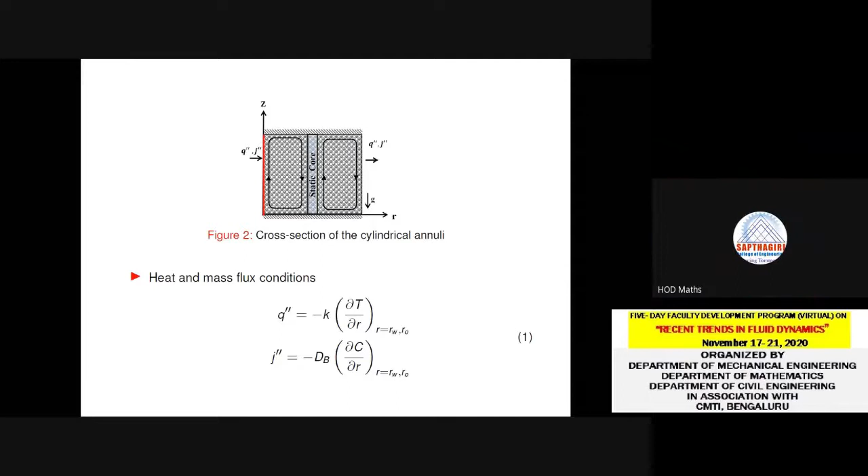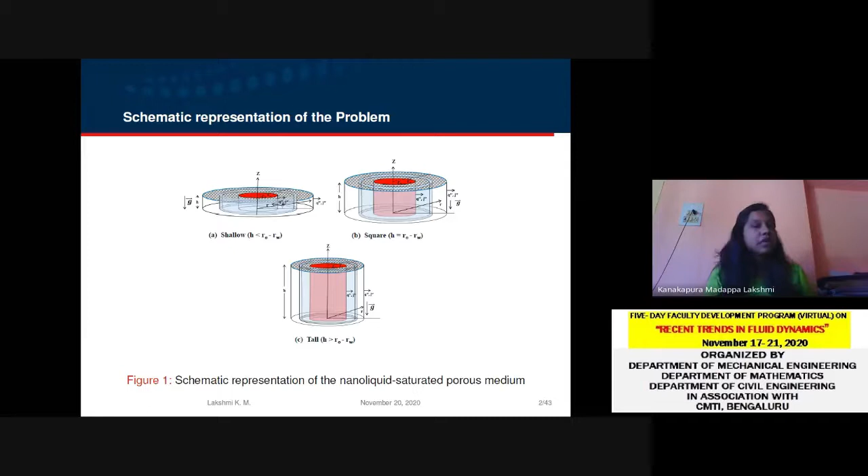Okay, yes sir. So I will start with the schematic representation again. The present work contains 3 different types of cylindrical porous annuli, namely shallow, square and tall porous annuli, where the inner cylinder is hot compared to the outer cylinder. The flow pattern considered in the system is explained in figure 2.

Since the inner cylinder is hot, the fluid particles near the inner cylindrical wall have more energy, so it starts moving upwards to form a convection cell. The strength of the heat and mass flux given to the system is such that the fluid particle has the energy only to move a certain distance near the inner wall of the cylinder, so it moves that distance and drops down. So one of the convection cells is formed near the inner wall of the cylinder.

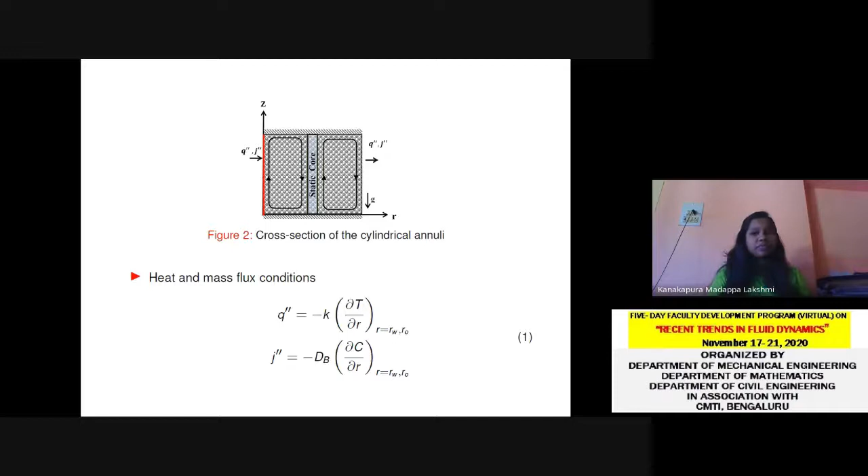A similar phenomenon can be observed at the outer wall of the cylinder, but in the opposite direction because the outflux is applied to the system. So these two convection cell flow patterns allow the system to generate a static core, which is just an imaginary region where the fluid particles are at rest. Mathematically, the heat and mass flux condition is given in equation number 1. This kind of flow pattern and this kind of study has possible applications in many fields, including thermal insulation systems, geothermal reservoirs, microelectronics cooling, etc.

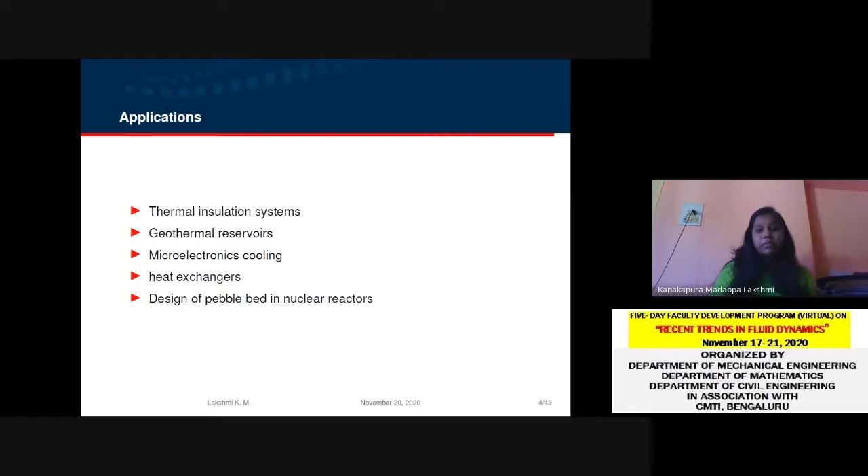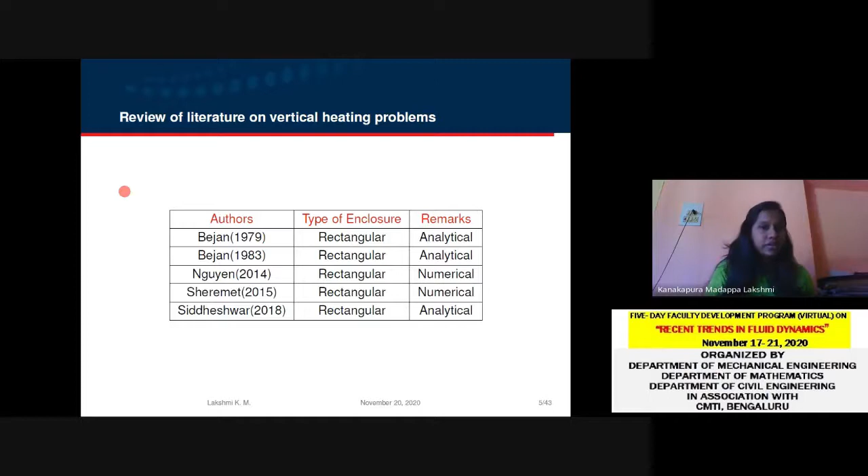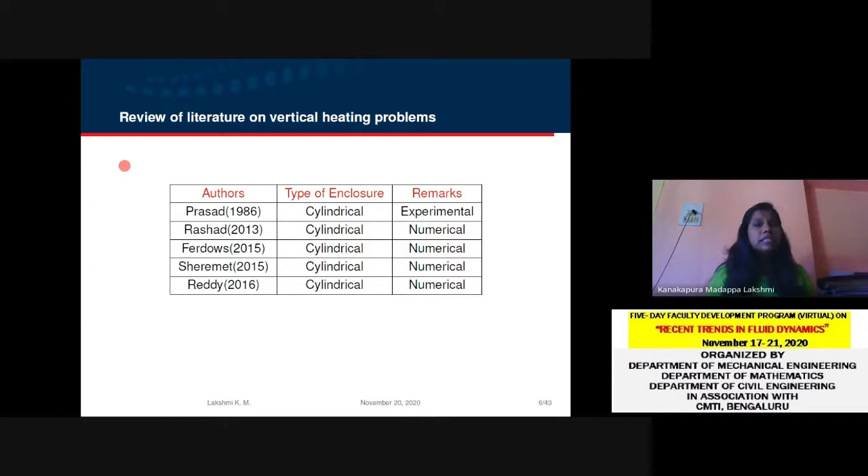Coming to the literature survey, this kind of flow pattern and this kind of work is analytically studied extensively in rectangular enclosures, and a few of them are recorded here. Coming to cylindrical geometry, there is no work available in literature which considered a natural convection problem in cylindrical geometry due to horizontal temperature gradient.

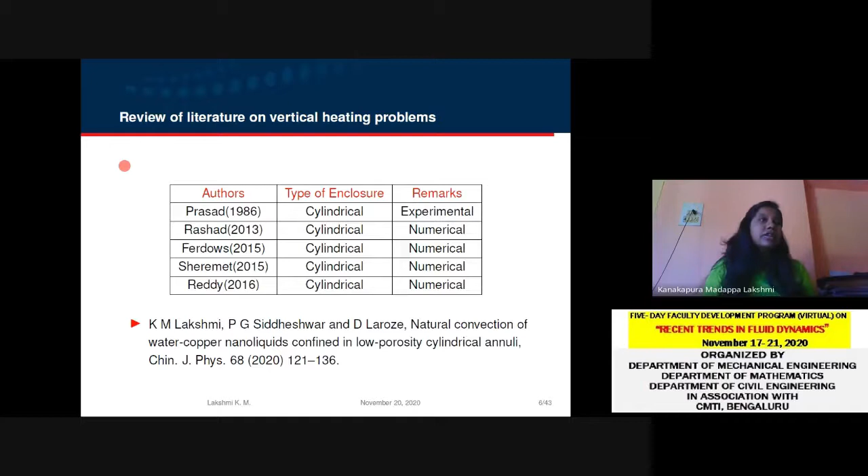Recently we have published this work in the Chinese Journal of Physics, and it appeared very recently. The same work I'm going to present now, but it is extended for aluminum alloy nano liquids.

So the highlights of the work: the analytical solution is going to be presented for a natural convection problem due to horizontal temperature gradient in cylindrical annuli.

The nanoliquid saturated porous medium considered in this study is assumed to be made up of water-based liquid, aluminum alloy nanoparticles, and glass bead porous material. For the aluminum alloy nanoparticles, we considered 5 different shapes.

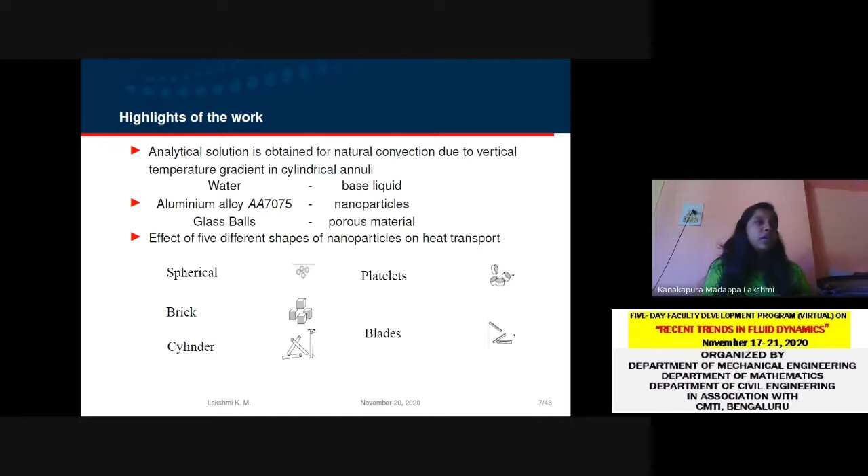The thermophysical properties of nanoliquid saturated porous medium are found from phenomenological laws and mixture theory. The phenomenological laws are used to find out the effective dynamic viscosity and thermal conductivity. Here mu represents the dynamic viscosity and K represents the thermal conductivity. N represents the shape factor, and it has a different value for different shapes, given in this slide.

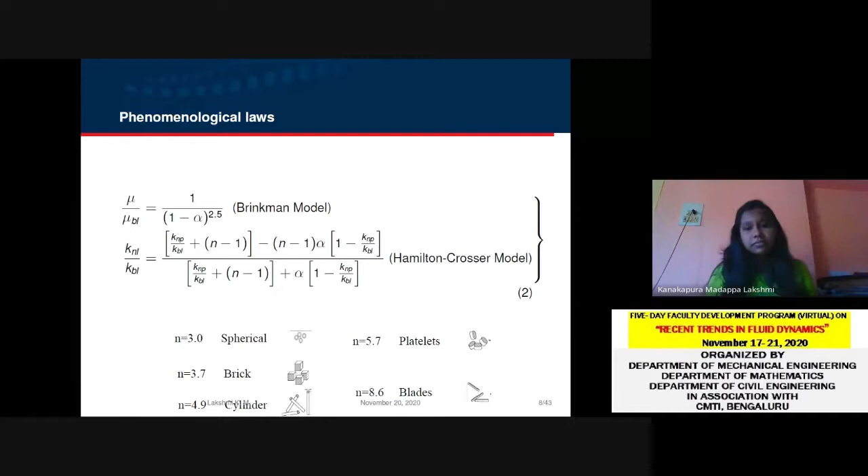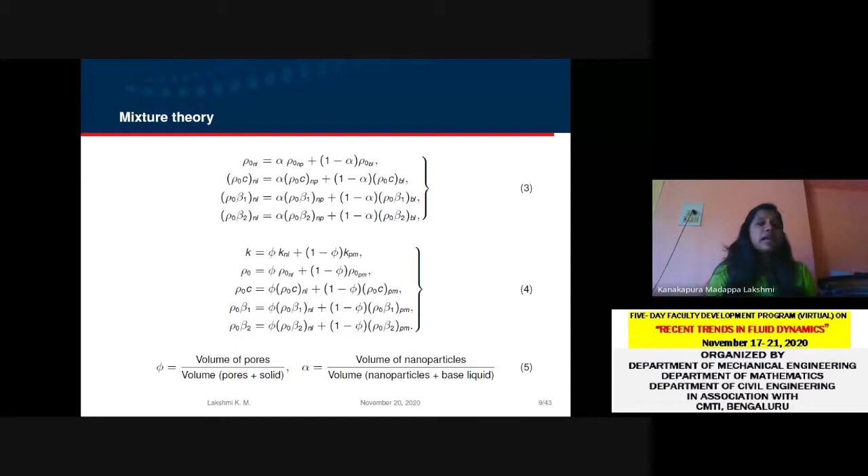The remaining thermophysical properties are found from the mixture theory. Here rho naught represents the density, C represents the specific heat capacity. Beta 1 is the thermal expansion coefficient, and the analogous concentration expansion coefficient is beta 2. Here phi and alpha represent the porosity and volume fraction. The definition of porosity and volume fraction is given in equation number 5.

Moving on to the mathematical formulation, the equations governing the problem are the conservation of mass, linear momentum, energy, and nanoparticle concentration, which are modeled for nanoliquid saturated porous medium using a modified Buongiorno-Darcy model.

The choice of this modified Buongiorno model in this study is because it is used to model the governing equations for nanoliquid, and from that modified Buongiorno-Darcy model, we can obtain the results of the KVL single phase model as a limiting case, because the nanoliquid can be modeled using the KVL single phase model and the Buongiorno two phase model.

The difference between the two models, KVL single phase and Buongiorno two phase, is that in the Buongiorno two-phase model we include two slip mechanisms important in heat transport study: Brownian diffusion and thermophoresis coefficient, given in equation number 9. Here dB represents the Brownian diffusion coefficient, and dt represents the thermophoresis diffusion coefficient.

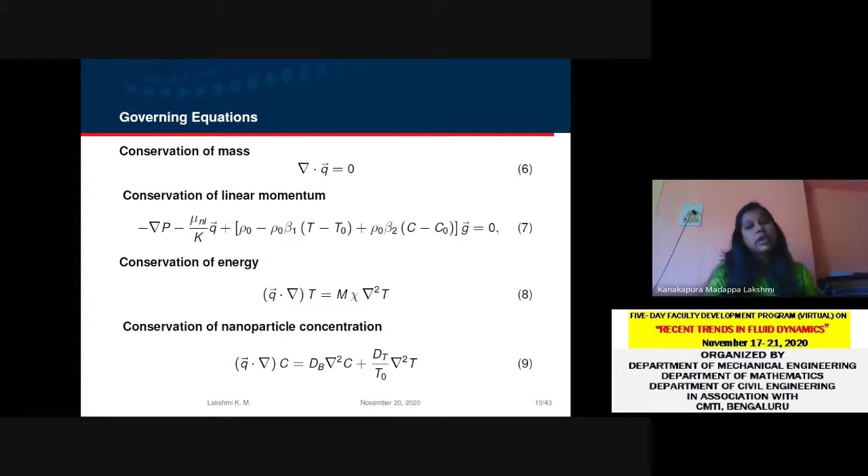These are important slip mechanisms included in the modified Buongiorno model, so that by neglecting these two effects in the present study, we can obtain the results of the KVL model at a later stage. For that reason, we have used the modified Buongiorno model to model the governing equations for nanoliquid, and the Darcy model for the porous medium.

On non-dimensionalizing the dimensional quantities as given in equation number 10, the method used for non-dimensionalization here is the order of magnitude analysis. In order to do this, we referred to the paper from Bejan, which is shown in the slide. So we have used the order of magnitude analysis.

The reason is because when the convection cell is forming, that creates a thin boundary layer region in the inner and outer walls of the annulus. So it is very important to give special interest to find out the flow velocity, temperature, and concentration in that boundary layer region.

In order to study the flow velocity, temperature, and concentration in the boundary layer region, it is required to modify or scale the dimensional quantities in that boundary layer thickness, which we can do using the order of magnitude analysis. Using that method, the non-dimensional quantities are given in equation number 10.

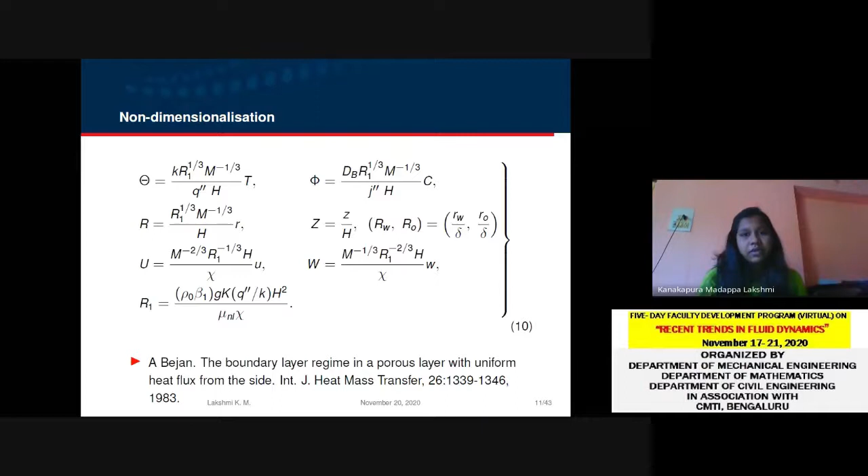Using these non-dimensional quantities, the non-dimensional form of the governing equations obtained is given in equation numbers 11 to 14.

Here delta represents the curvature parameter in equation number 11. The use of this curvature parameter is that on taking the zero value for delta, we can obtain the results of a rectangular enclosure as a limiting case, because the difference between the cylindrical enclosure and the rectangular enclosure is the curvature effect. So on neglecting this curvature effect in the present study, we can obtain the results of a rectangular enclosure as a limiting case. In order to have rectangular enclosure results, we keep this curvature parameter value zero in all the equations.

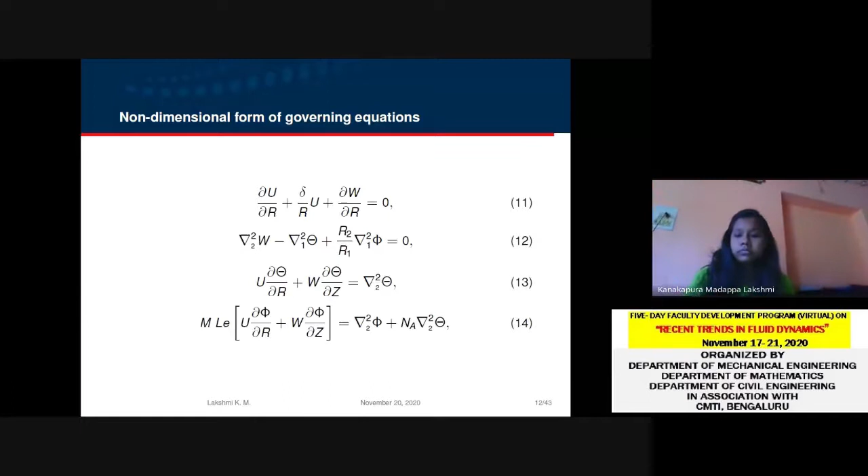Here R2 represents the thermal concentration Rayleigh number, Na is the modified diffusivity ratio, and Le is the Lewis number.

Similarly, the non-dimensional form of the heat and mass flux conditions are given in equation numbers 16 and 17.

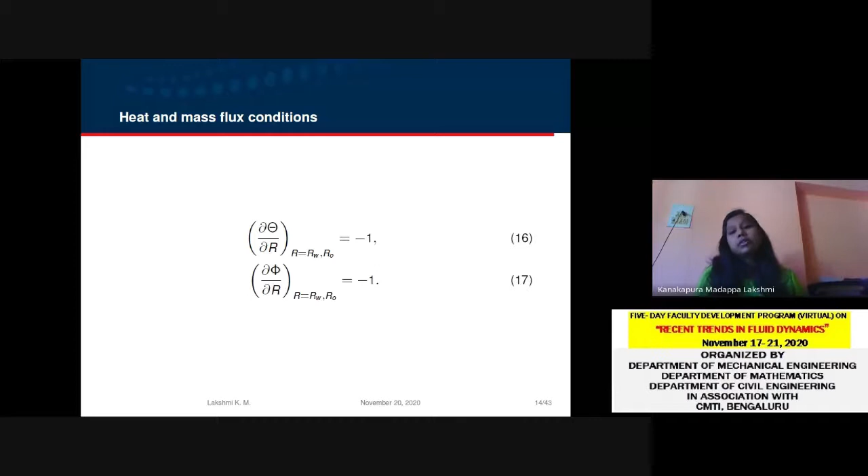The non-dimensional form of the governing equations are solved analytically using the Oseen linearization technique. The Oseen linearization transformation technique is a simple technique used for isothermal boundary conditions, and it is suggested by Weber.

It assumes the following properties, which are listed here: a Z-independent constant boundary layer thickness, a fixed core region, a linearly stratified core region, and lastly, linearly increasing temperature and concentration along the vertical walls.

These four properties of the Oseen linearization technique allow us to choose the temperature and concentration equation in the form of equation number 18. Here theta r and phi r represent the temperature and concentration profiles, while theta naught and phi naught are the ambient temperatures found at the core region.

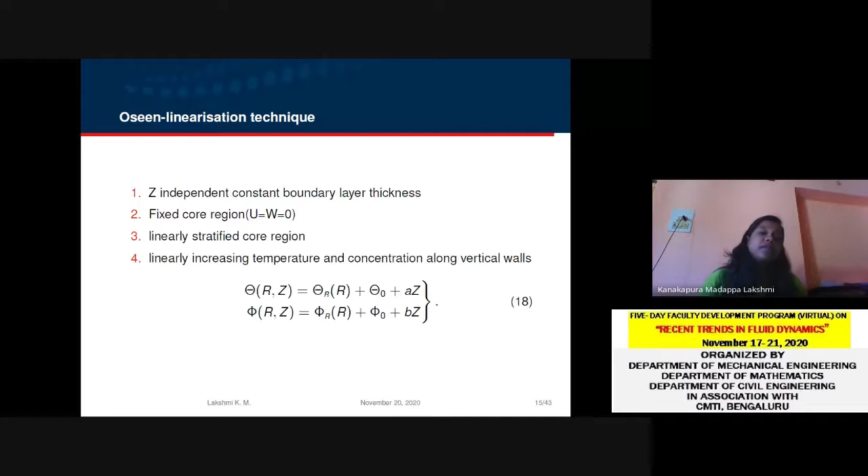Core region in the sense, the static core region. Here A and B represent the temperature and concentration gradients. As I already mentioned, at the static core the fluid particles are at rest. Since the fluid particles are at rest, the temperature and concentration profile values will be zero at the static core.

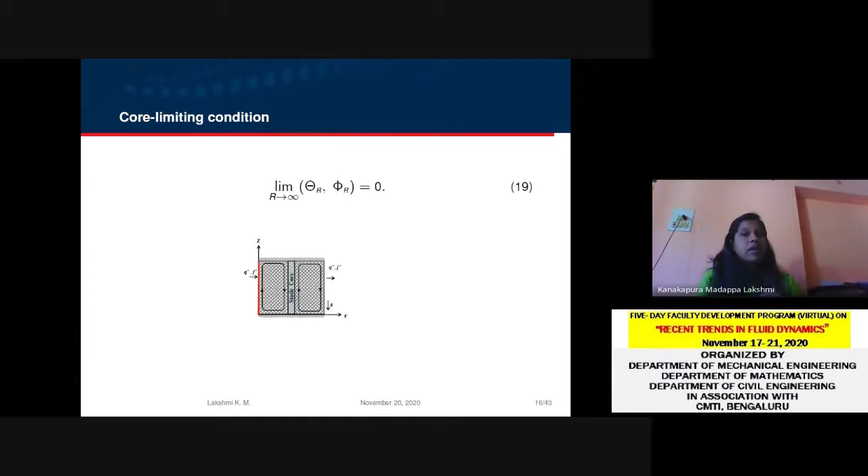Here, the limit r tends to infinity represents the value of the radial coordinate at which it meets the static core.

This Oseen linearization gives the following non-dimensional form of equations, given in equation numbers 20 to 22. The use of this Oseen linearization technique is that equations 20 to 22 are only dependent on the radial coordinate value r.

It is independent of z. So the Oseen linearization transformation technique converts the two-dimensional problem into a single-dimensional form, one-dimensional equations.

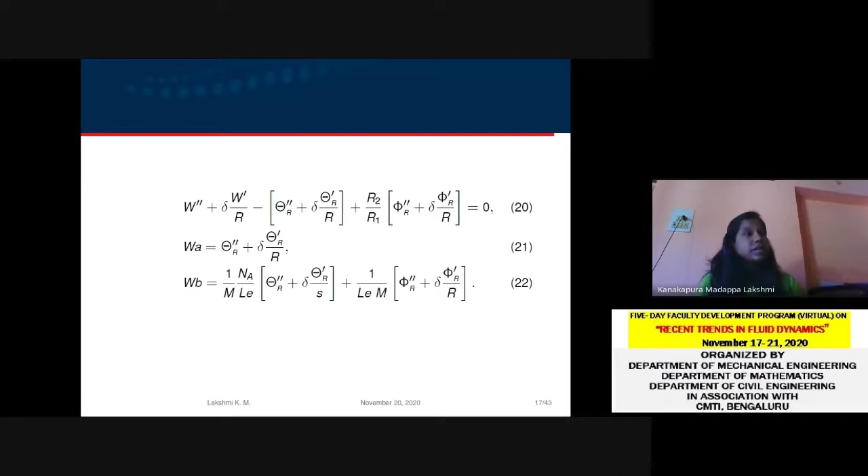So it is transforming that, and also the Oseen linearization transformation technique reduces the non-linearity in the equations, so that the non-linear form of the governing equations is converted to linear form, and the two-dimensional form is converted to one-dimensional form. This is the beauty of the Oseen linearization technique—it's a very simple technique, and it reduces the most complex aspects of the non-linear study.

On decoupling equations 20 to 22 and considering only the temperature equation, given in equation number 23, we get a second order modified Bessel's differential equation.

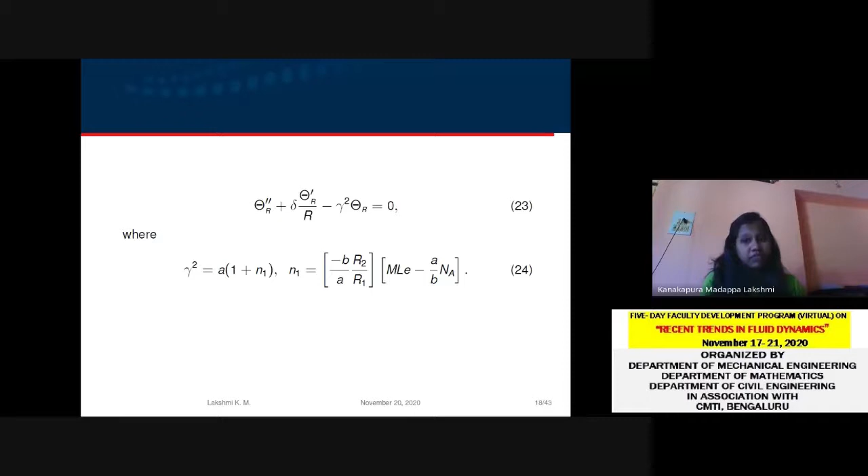The solution of which is in terms of modified Bessel functions, given in equation number 25. Here the definition of gamma is given in equation number 24. In the gamma squared equation, N1 represents the buoyancy ratio.

As we know, Bessel functions are difficult to handle mathematically since they are infinite series expansions. So in order to have a simple mathematical form...

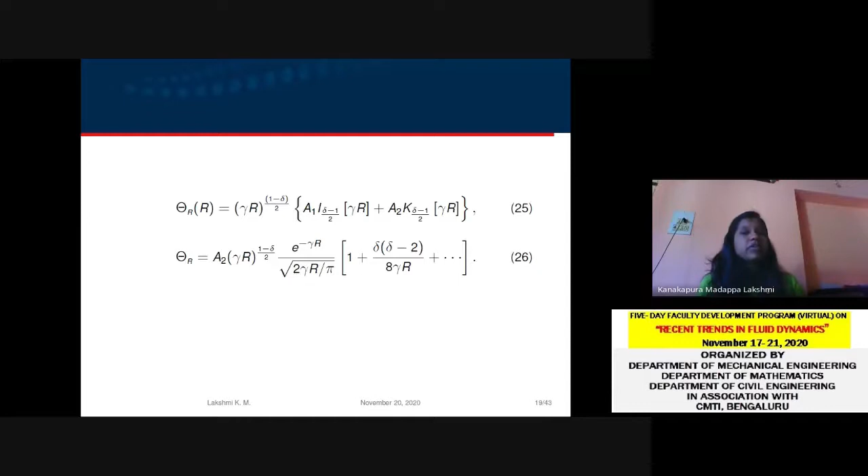we have used the asymptotic expansion of equation number 25. The asymptotic expansion of equation number 25 is given in equation number 26. For the computation, we have used only a few terms of equation 26, given in equation number 27.

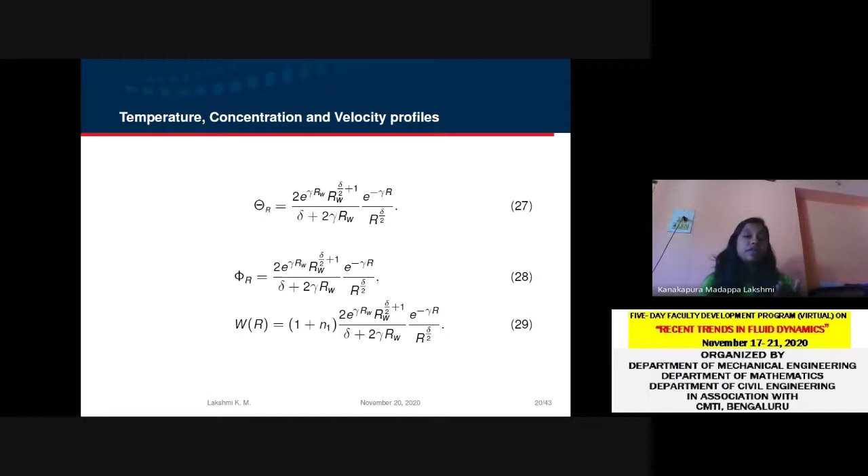Similarly, we have found the expressions for concentration and velocity, given in equation numbers 28 and 29. After having solutions for temperature, concentration and velocity, we have written the solutions at the inner wall of the cylinder, given in equation numbers 30 to 32.

Equations 30 to 32, and then solutions at the outer wall of this cylinder are given in equation numbers 33 to 35.

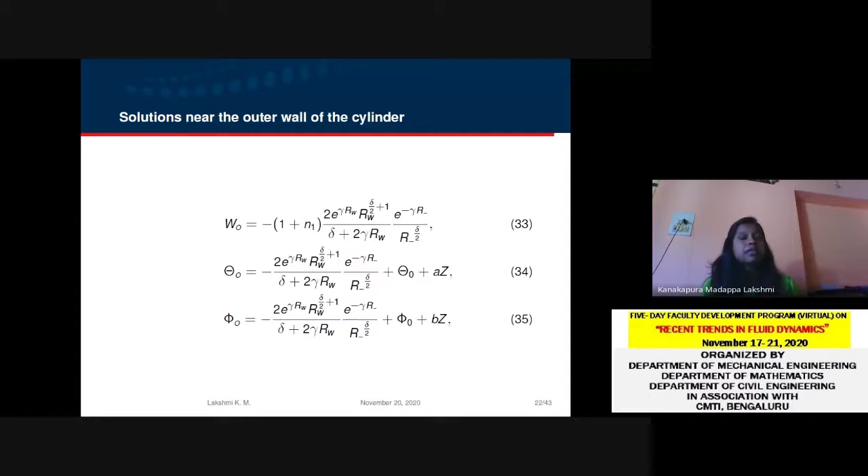In solutions 30 to 35, we can observe that all the solutions are known, but A and B are still unknown. A and B appear in equation numbers 34 and 35, which represent the temperature and concentration gradients. So in order to find the equations for these temperature and concentration gradients, we have used the enthalpy condition.

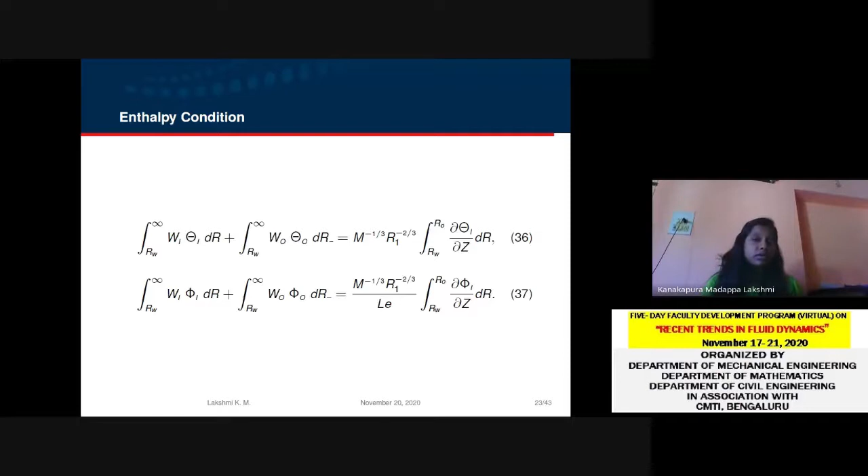So the temperature gradient can be found using the enthalpy condition. A similar analogous condition for concentration is given in equation number 37. On solving equations 36 and 37, we can obtain the expressions for temperature and concentration gradients, given in equation numbers 38 and 39.

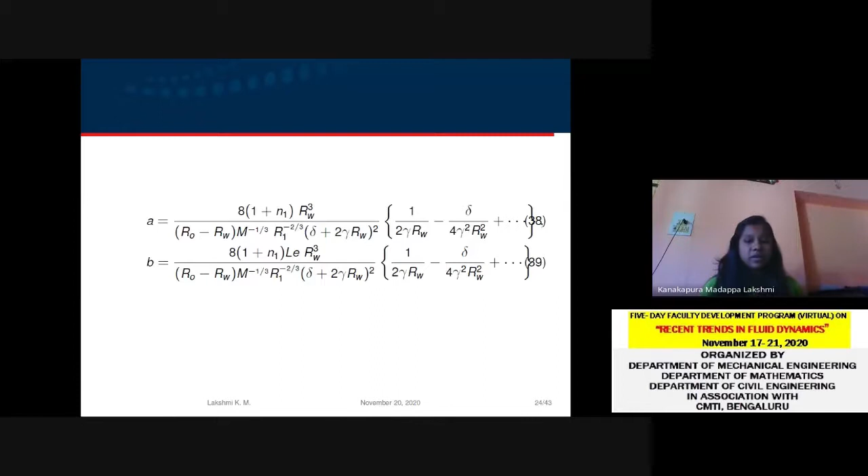After having expressions for A and B, all the solutions are now completed, so that we can move on to the actual findings of the study, that is the heat transport.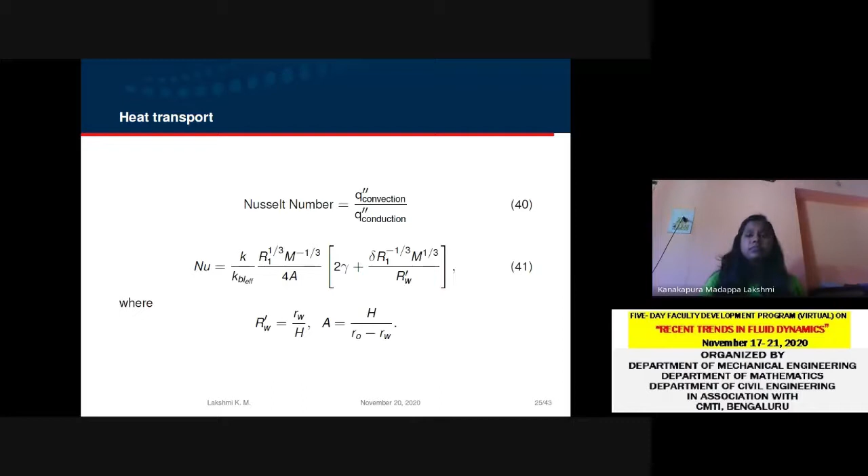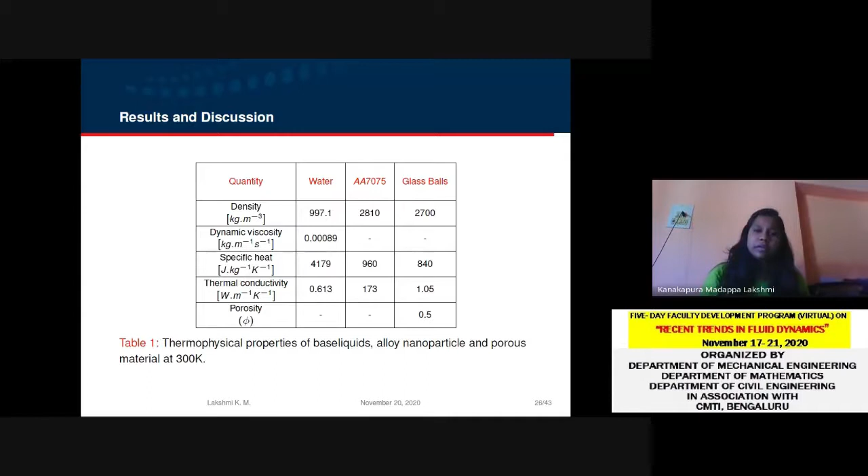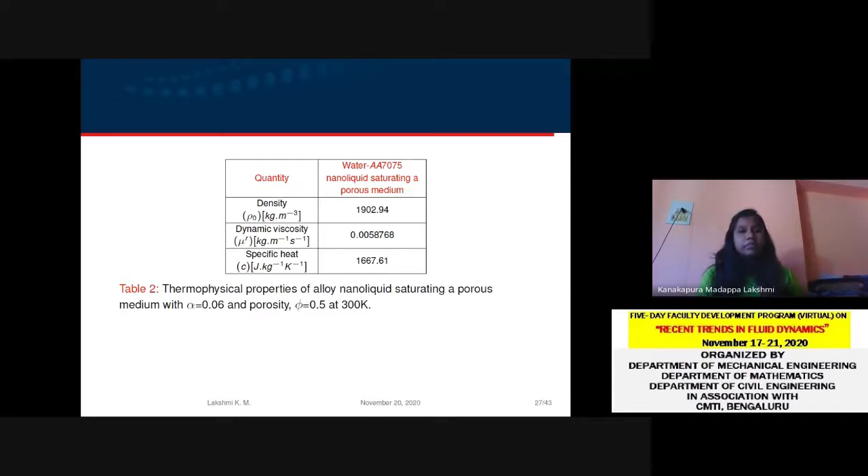Moving on to the results and discussion, in table 1 we have tabulated the thermophysical properties of base liquids, alloy nanoparticles, and porous materials. In table 2 we have tabulated the thermophysical properties of nanoliquid saturated porous medium, and in table 3 we have tabulated the thermal conductivity and diffusivity values of a nanoliquid saturated porous medium for different shapes. These properties are found from phenomenological laws and mixture theory.

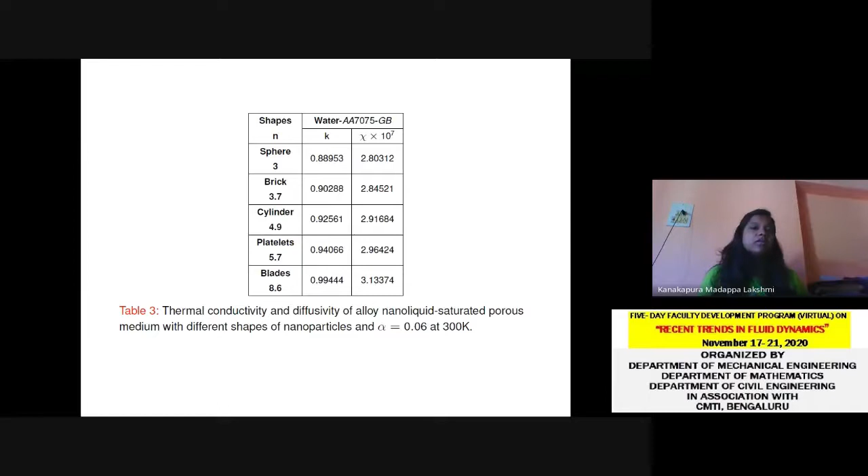Figure 3 is the plot of thermal conductivity versus volume fraction, and from the graph it is clear that the effective thermal conductivity of blade-shaped nanoparticles is highest compared to all other shapes.

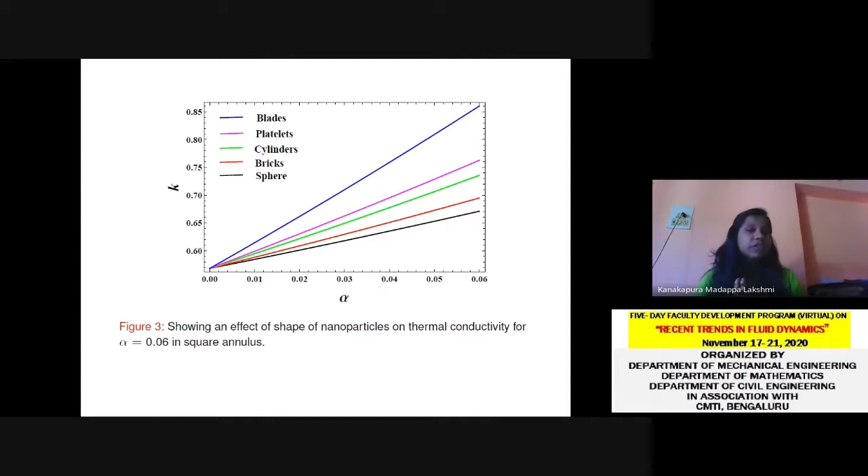The reason behind this finding is that compared to all other shapes, blade-shaped nanoparticles have a large surface area, so the thermal conductivity in that case is higher. Also, blade shape offers the least friction for fluid flow. So the thermal conductivity inequality is given here.

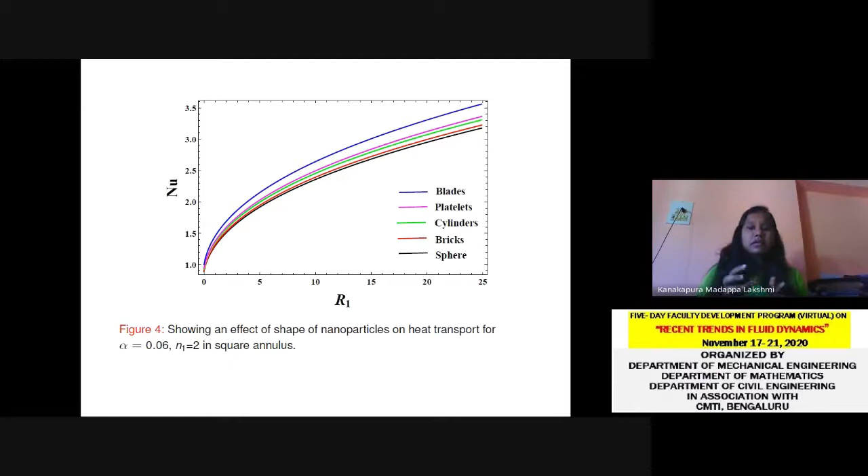The thermal conductivity of a blade-shaped nanoparticle is highest compared to platelets, cylinder, bricks, and spherical shapes, and the same pattern can be observed for the Nusselt number. As we know, thermal conductivity is the key factor for heat transport in the system, so the heat transport, that is the Nusselt number, follows the pattern of thermal conductivity. The heat transport is maximum for blade-shaped nanoparticles, and minimum for spherical shape.

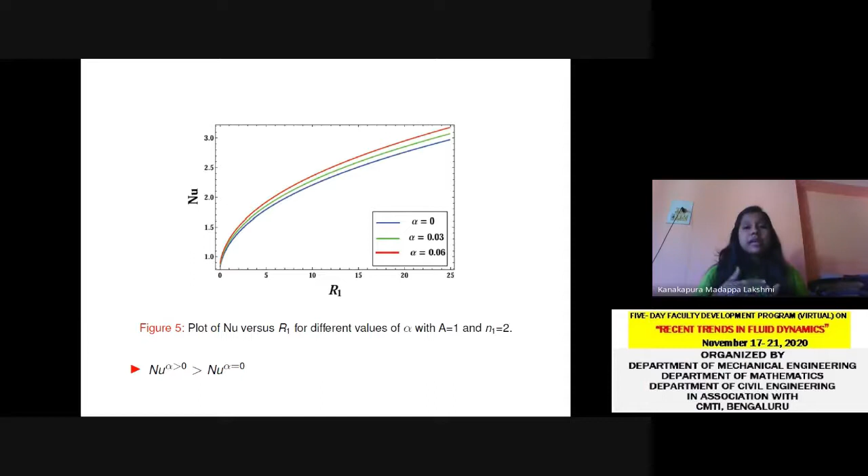Figure 5 is the plot of Nusselt number for different values of volume fraction alpha, and from the figure it is clear that as the volume fraction increases, the heat transport in the system increases. So we can conclude that the addition of a dilute concentration of nanoparticles in the system significantly enhances the heat transport in the system.

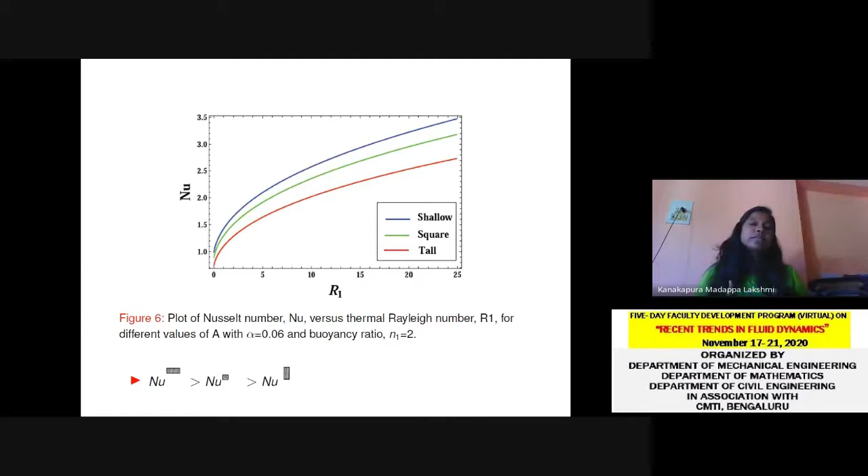So a small amount of heat is sufficient to form a convection cell in the case of a shallow annulus compared to square and tall annulus. So the heat transport is maximum in that case compared to square and tall annuli.

Figure 7 is the plot of Nusselt number for various values of inner cylinder radius, and from the graph it is clear that the value of inner solid cylinder radius has an adverse effect on heat transport.

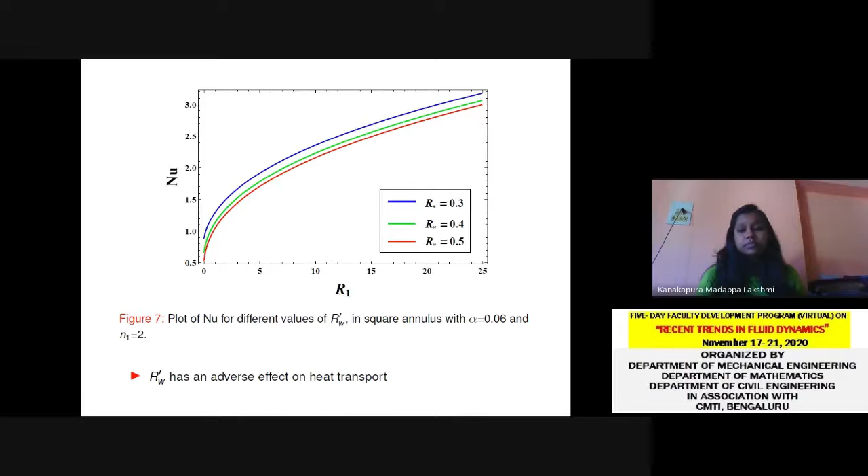Figure 8 is the plot of Nusselt number for various values of buoyancy ratio N1, and from the graph it is clear that as the buoyancy ratio increases, the heat transport in the system increases. It is also clear that heat transport in the case of heat and mass driven convection is maximum compared to purely heat driven convection.

Heat and mass driven convection in this sense represents a nanoliquid saturated porous medium, while purely heat driven convection represents the case of a base liquid saturated porous medium in the absence of nanoparticles.

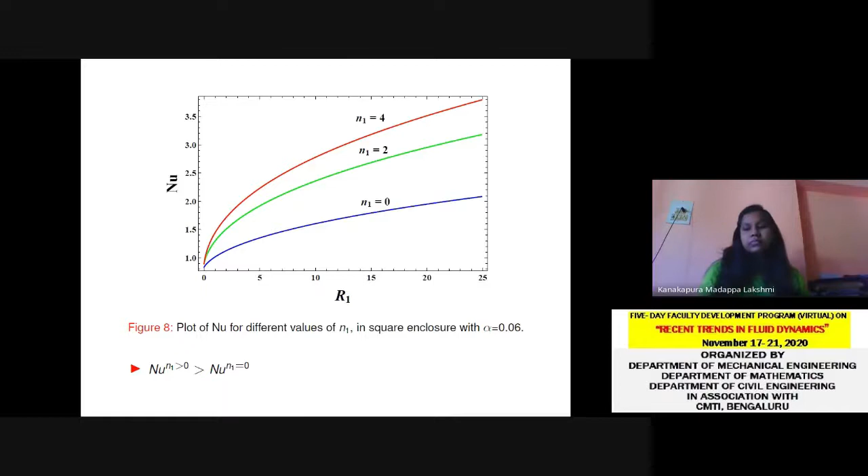In concluding, this work is a benchmark problem for natural convection in cylindrical geometries. Though this problem has limitations in the flow pattern, it is a benchmark problem because there is no prior analytical work considering natural convection problems in cylindrical geometry. So this is the first work, and it will serve as a benchmark problem for these studies.

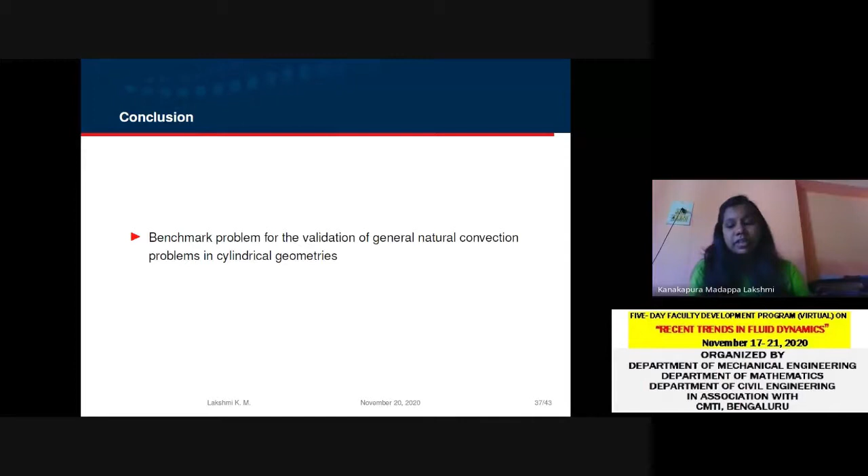The other conclusions are as follows. The heat transport in the case of a nanoliquid saturated porous medium is maximum compared to a base liquid saturated porous medium. The thermal conductivity and the Nusselt number are maximum in the case of blade-shaped nanoparticles compared to platelets, cylinders, bricks, and spherical shaped nanoparticles.

The heat transport in the case of a shallow annulus is maximum compared to square and tall annuli. The inner solid cylinder inner radius to height ratio has an adverse effect on heat transport.

Heat transport in the case of purely heat driven convection is lesser compared to heat and mass driven convection. The results of the KVL single phase model can be obtained as a limiting case of the considered modified Buongiorno-Darcy model.

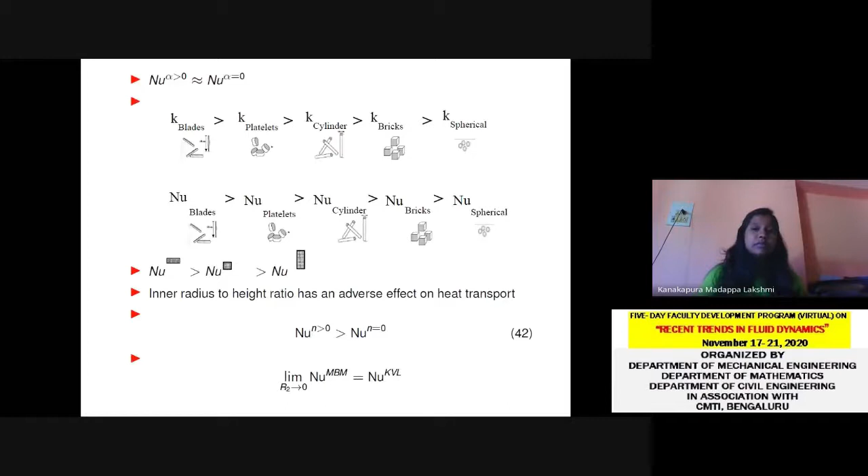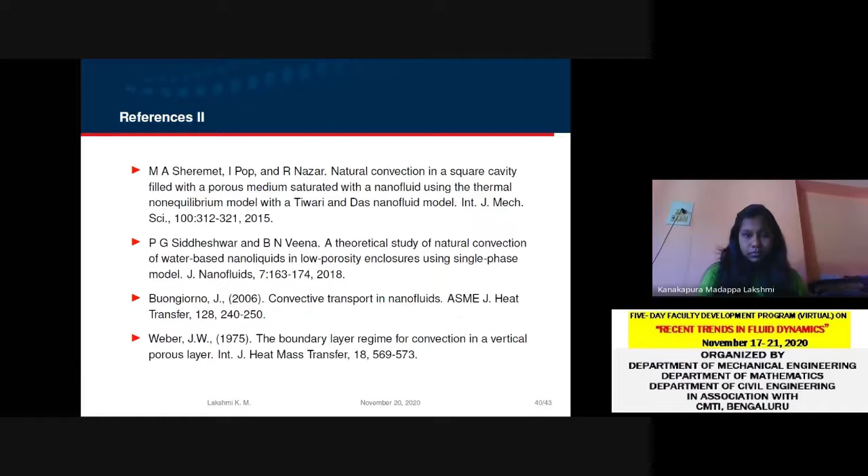Here are the few references. Thank you.

Thank you, Lakshmi, for your nice presentation. It was very good. Thank you, sir. Yeah, being a young researcher, everybody should follow you. All the faculty should also follow you, and make up their mind to go into the research field.

So that is the last session of the day. I hope, sorry, this is the difference between the young scientists and all. She has closed sharply at 4:27, just 3 minutes left. She has made use of the entire session. Okay, thank you, Lakshmi, for your nice lecture. Thank you. Thank you, sir. Thank you very much.